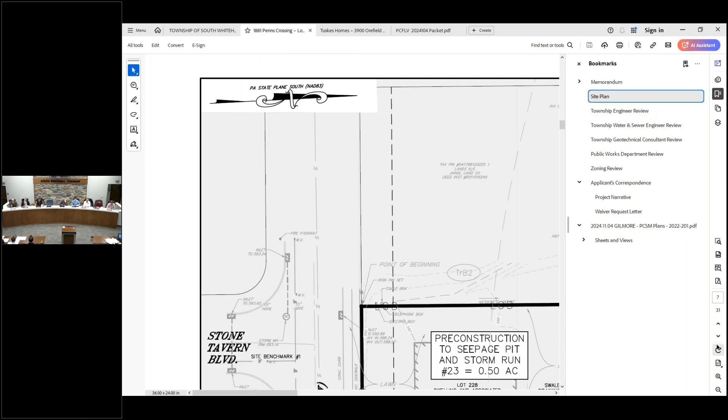The additional impervious cover and the dwelling will conflict with the location of the original seepage bed and the storm sewer pipe. So the applicant is proposing to relocate the storm sewer pipe to the north across this lot and also the lot to the east, lot 227. And then they will be constructing an on-lot infiltration basin on the additional land they acquired to control the stormwater generated by the home and additional impervious cover. So that's the history on the project.

Go over some of the items in our review letter. The applicant is requesting 4 waivers for the stormwater management design: one regarding the emergency spillway, the slope of the basin bottom, an access ramp, and anti-seep collars. We only have a few comments on the project. Most of them are administrative or legal in nature, requiring the applicant to take the easements across this property and the adjoining property to allow for the relocated storm sewer pipe and to also extinguish the existing easements that exist on lot 228 and 227.

Make sure they establish the ownership and maintenance of that storm sewer pipe. It will be privately owned and maintained by the applicants and the owners. Also establish a BMP O&M agreement for the on-lot seepage bed, infiltration bed, and then also make sure they record all the appropriate easements and agreements and plans. We do have a couple drafting issues. They just need to clarify some of the grading around the basin and also correct some minor revisions in some of the notes and specifications on some of the details.

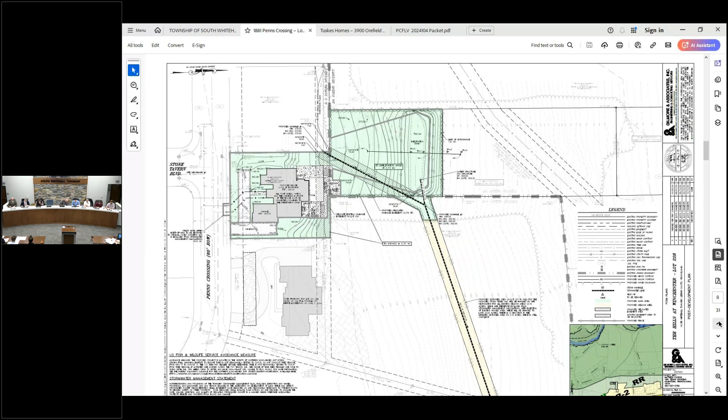The first condition is the standard, if deemed necessary prior to plan recording, execute all of our agreements. We have satisfaction of the township engineer's letter, water and sewer engineer, I don't think there were any comments for that, the geotech consultant, public works department, community development department, Lehigh County Conservation District, PA DEP. Conditions 9 and 10 talk about the easements that are required for this property and the adjacent property, and 11 and 12 are just standard cleanup. So those are the conditions that we are recommending.

Thank you. Applicant, it's all yours. Thank you, Mr. Wilson. I'm Chris McLean from Fitzpatrick, Lentz & Bubba. To my right is Ben Kutz of Gilmore Associates, the project engineer. And to my far right is Matt Pucker, the owner of the property.

I appreciate Mr. Manhart and Mr. Timmix's summaries. I really don't have much more to add. It's pretty straightforward as to what we're looking to do. With that additional land that was acquired and added to lot 228 in the Hills at Winchester subdivision, we are planning now to put in pool, patios, and some other accessory uses, which necessitated some of the adjustments to the stormwater management components as described already.

I did submit the proposed easement between my client and the neighbors, the Patels, to Attorney Alderfer last week. Earlier today, we had some discussions as to how we can modify that document to specifically address condition 9 in the recommended conditions relative to that easement and a dedication to the township. We have a path forward on that. I owe her some additional language, which we will take care of expeditiously.

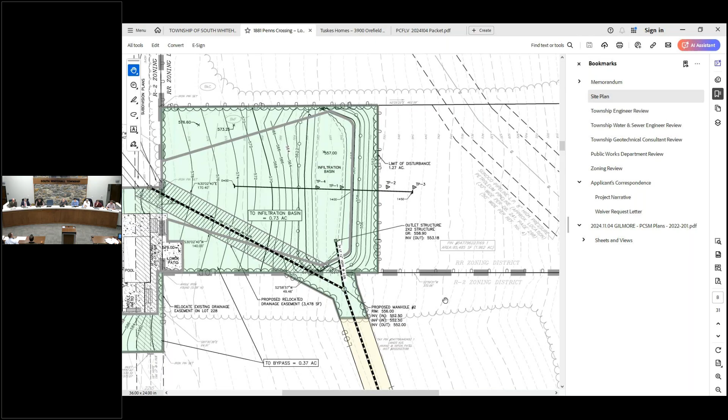All right. That was waiver request 1. Would you like to go over waiver request 2? Sure. I guess just in brief. So comment 2 is regarding a minimum longitudinal slope of 2% across the bottom of the facility. It's typically a requirement that applies to a detention basin, not an infiltration basin or infiltration facility where they want it to be flat so that you're not concentrating the stormwater where it's getting infiltrated into the ground. And so that was the basis for that request. And the DEP standard is actually to make it flat. That is correct. Okay.

On waiver request 3, this is from the requirement for a maximum 10% slope to permit access to the bottom of the basin for maintenance. Again, a requirement like this is completely appropriate and intended for larger basin facilities with a much larger depth, where maintenance by larger vehicles would be required. This is a much smaller infiltration facility just serving the individual lot. So it's not a cause for concern or appropriate in this instance. Okay. Does our ordinance require the property owner to maintain their basin?

What were the questions? Yeah, I mean, the ordinance gives the option of the township or the property owner. It's at the discretion of the township. In this case, it will be the property owner's responsibility to own and maintain the basin and also the pipes that are being relocated as part of this project. Historically, the township wants them to remain private. Yes, that makes sense. I just want to clarify. I mean, basically it serves one lot. Yeah, the owner should be responsible for it. Thank you.

And then the last one is regarding the provision of anti-seep collars along the basin discharge pipe. These are typically square concrete. They call them collars, basically a couple feet that extend beyond the pipe. You put them at set intervals. The intention is that when you get a decent amount of ponding in a basin, the pressure from the water will tend to erode around the edges of the basin outflow pipe if you don't have these things in place.

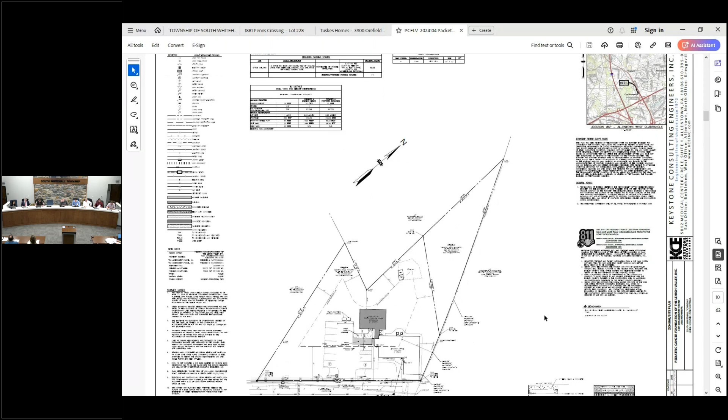The initial deferral request letter mentioned local road standards, and Crackersport actually at this location is considered a collector road. So we reached out to the engineer, and I believe they have the letter with them tonight, but they just revised their letter to reference the correct ordinance section as a collector road. Our commentary regarding the cartway width and the right-of-way width would still remain within our memo. There are 4 additional waiver requests as well. Typical, this is for general minor drafting standards.

And one other thing I'd like to point out for the deferral request. This deferral request was consistent to what was recommended by the PC and ultimately approved by the board last week for the Palmero Realty project, which was just across the street. At this time, conditioned on addressing the items contained in our December 5th memo, we can recommend engineering approval. Thank you. All right, would the applicant like to do your presentation?

Well, I'll keep it brief. It's a pretty straightforward project. It's a 1,200 square foot building expansion. From a site engineering perspective, it's really pretty low impact. There's no additional office space proposed, so there's no parking demand. The stormwater management, it is exempt from the stormwater management requirements of the ordinance. Its total impervious cover is under 10,000 square feet.

Grading design was prepared to provide positive drainage away from the building and to maintain the existing drainage patterns on the site. And we are providing site lighting and street trees and parking lot trees in accordance with township standards. And I do have copies of that revised deferral waiver request letter, if anyone from the planning commission would like a copy of that. Yeah, if you want to just pass them out. Sure.

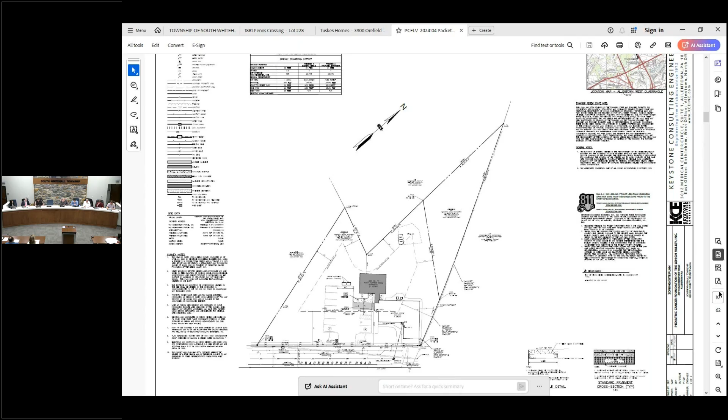Well, I will make a motion under deferral of the SALDO 31226A4 and 31235B3C of the collector street requirements, as noted in the Keystone letter and the South Whitehall letter. Make a motion for that deferral. Second. Those in favor? Aye. Aye. Those opposed? None opposed? I don't know if I heard anything online. I voted aye. Okay. All right. Everyone was in favor, so moved.

On to number 2, SALDO 31212B15. This is a very typical waiver for showing existing contours within 400 feet of the tract. Make a motion. Second. Those in favor? Aye. Aye. Aye. Those opposed? None opposed? So moved. On with number 3, SALDO 31212B19. Another comment showing existing features within 100 feet of the development. I'll make a motion. Second. Those in favor? Aye. Aye. Aye. Those opposed? None opposed, so moved.

Number 4, SALDO 31212B20, showing buildings within 100 feet of the tract. I'll make a motion. Second. Those in favor? Aye. Aye. Those opposed? None opposed, so moved. Lastly, SALDO 31212B21. Is that a repeat? No, showing existing features within 400 feet of the tract. We'll make a motion. Second. Those in favor? Aye. Aye. Opposed? None opposed? So moved.

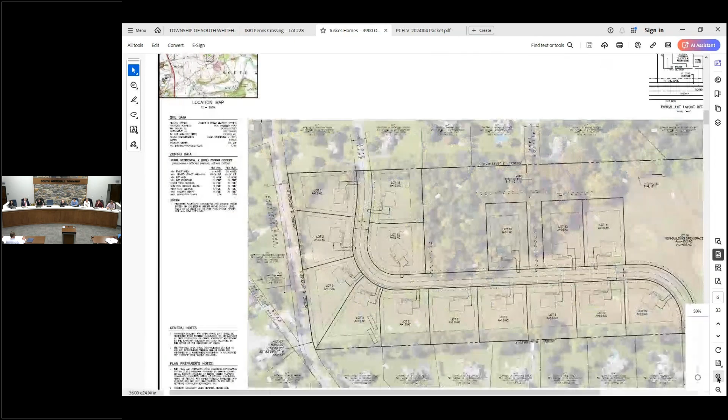I reserved what would be a right-of-way area through there if there was any intention for a connection. It seems as if there was a comment later on in the memo indicating that the comprehensive plan has changed since that map was published, and that the roadway layout that we're proposing here is more consistent with that proposed or pending future plan. Our proposal is to interconnect Lois Lane with a serpentine road up to Pheasant Hill Drive. So if there is no intention of having Allison Lane interconnected, we could shift lot 13 over and eliminate that space, further preserving some of those woodlands in that area.

Any comment or thoughts on Pidcock review comment 1? If you want to get into further detail on it. No. I'm sorry. If I could just add, one of the comments that we've had from the water utility is that there's a dead end for the water line along Allison. Water utilities are always interested in making interconnects and looping systems, so they would request that be connected for redundancy. Yeah. I think that's an important thing, to connect the water line.

When we do get to audience questions and comments, I think it would be nice to have some input if the residents have any thoughts about extending Allison Lane. I know some people like having their house on the dead end of a road and not introducing new traffic. Others have other thoughts. This is a discussion item we'd like to receive your input on. All right. No further comment there? Anyone online?

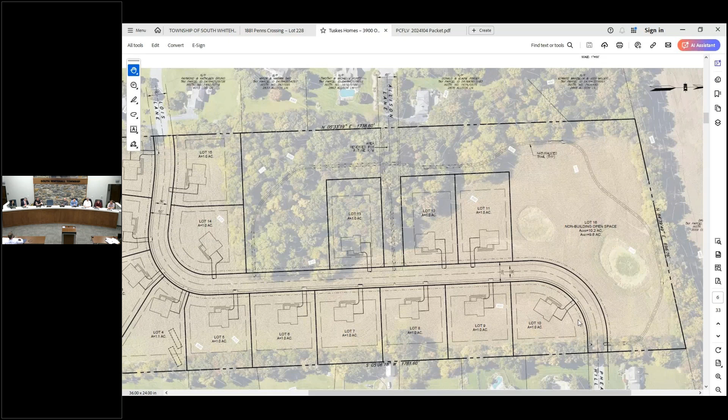All right. Anyone else in the audience? All right. Anyone else online? Okay. Thanks for coming out. I know our last two planning commission meetings were pretty much empty, so sometimes it's nice to have an audience and hash things out. But yeah, as I said earlier in the meeting, this is just a sketch plan, so we're not voting on anything. We're not making any motions. It's just to provide initial feedback. All right. And thank you. We appreciate all the feedback. Thank you.

All right. And if people in the audience want to have personal conversations, if you could just have it outside the meeting room here. All right, if you would like to have your personal discussions, if you could just have it outside the meeting room.

All right, agenda item number 5, transportation infrastructure update. I guess that's me. The Lehigh Valley Walk audit was done in 2023, and they were looking at certain locations for accessibility, aesthetics, and walkability challenges. There appear to be 2 to 3 locations in the township that they were looking at. This data will soon be published via a web map. And then there were no further updates for the township for the TIP.